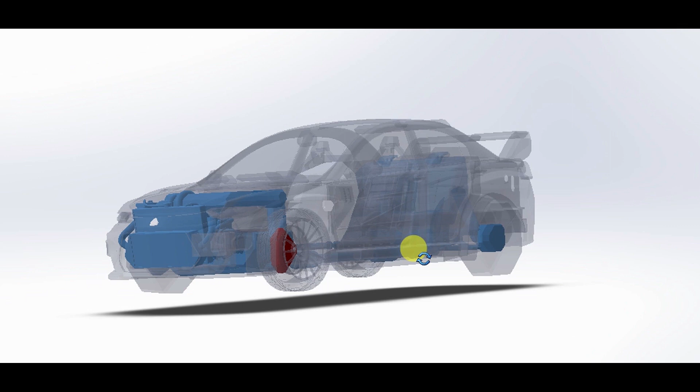On today's episode, a deeper look at the design process of the latest incarnation of a 90s icon, a hero for the Gran Turismo generation, and a legend of rallying. This is the 2018 Mitsubishi Lancer Evolution 11 by Adan Design.

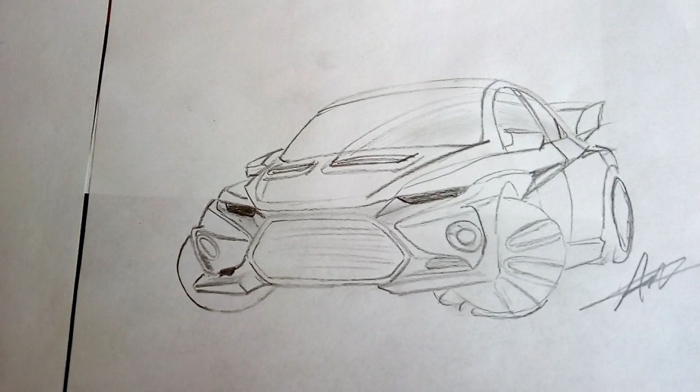These are some of the main sketches I used to develop my Mitsubishi Lancer Evolution 11 project. This one is the first to get all the main key elements I wanted the final project to have, such as the front power shield, that is this shape, this signature graphic Mitsubishi is currently using all across its model range. Of course, other Mitsubishis got massive chrome stripes right here on the side, but this being an evolution, it's all about business, and business has nothing to do with chrome. Also all about business is the front grille, that is a key evolution element across all its generations, because Evos had always got front-mounted intercoolers, and they are very exposed on the front of the car.

Even the side-mounted plate was mounted there to allow more fresh air into the front intercooler. We also got rally-inspired fog lights, and these brake intakes I took straight from an Evo 5. Also we got the main line that flows all across the car, and that, as you can see, it also evolved from these very rough sketches into something more serious. It gave me that dynamic sensation I wanted the car to have, and it started to get more and more concrete across these sketches.

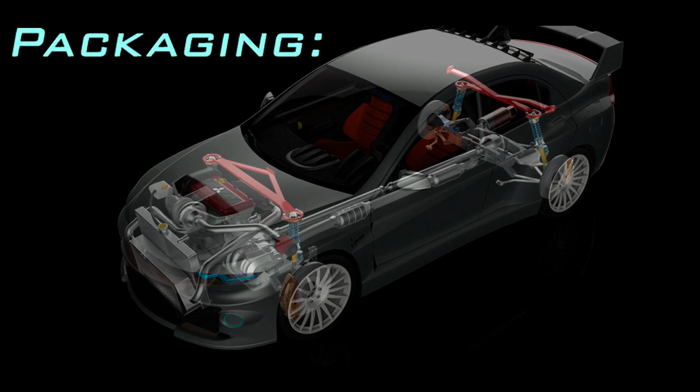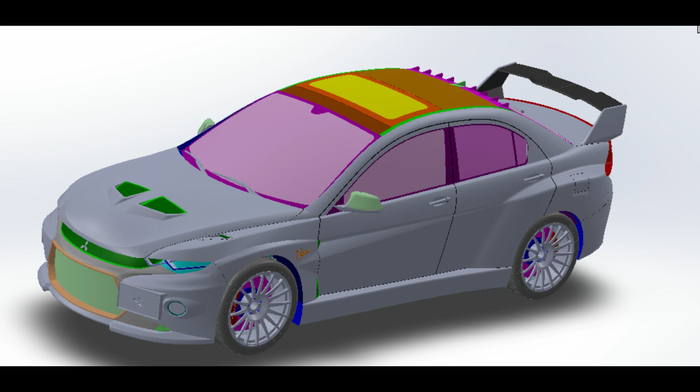First step is getting the packaging right. You know, all those things your Evo needs to be an Evo, like seating for 4, a turbocharged 2-liter engine, a complex all-wheel drive system, rally-inspired suspension, a 6-speed manual transmission. Making this will ensure the car got more realistic proportions.

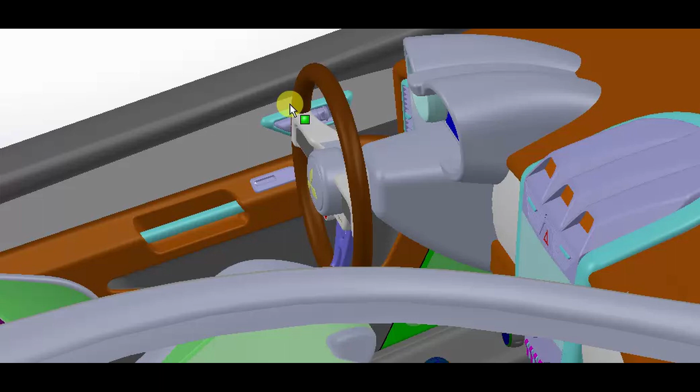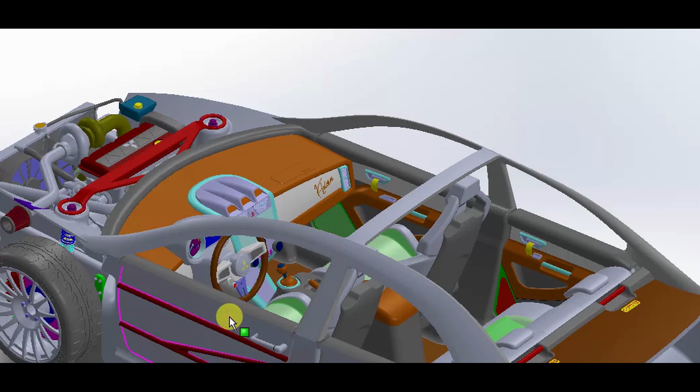I also made an interior with front Recaro seats, a rear bench, a modern Momo steering wheel, and these Porsche-style strap door handles, because I like Porsche-style strap door handles very much. The interior has two main continuous lines, this one on top and this aluminum surface that flows all around the cabin to improve the quality perception.

Also you can see that the whole center console is leather wrap. Also the steering wheel is leather wrap. Pretty much every surface you get in contact with, here shown in brown, is leather wrap.

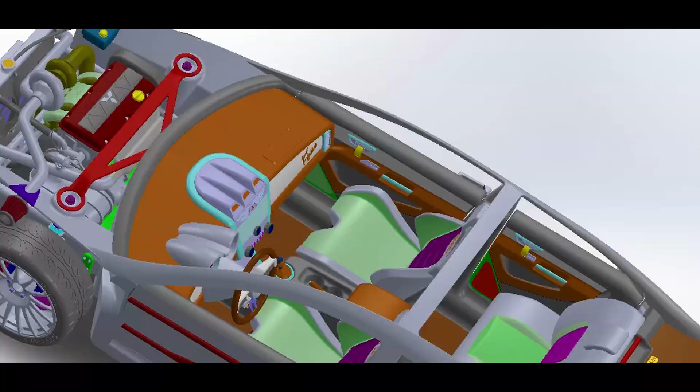I need to clarify this. Evos are about driving pleasure. They were never meant to be luxury cars, nor these good-at-everything cars like, you know, a GTI. Evos just demand a certain level of compromise. And if you take away all these little compromises, you will also take away some of the character and some of the involvement a car like this gives to you. With this said, the Evo needs to improve its interior quality and materials just to be suitable for today's market.

As a designer, you need to consider this and improve the interior without losing the Evo personality. So yes, it is a better interior, but it is still an Evo interior. This particular car took me about 3 months to develop.

I made everything from the sketching to the 3D modeling and even the rally livery, which was inspired by Marlboro rally liveries from some early rally evolutions with a touch of 90s retro nonsense graphics. Of course, this being a 2018 Rally Evo, it cares about children, and it promotes Ralliart instead of cigarettes, because this Evo wants the children to know they should only smoke their tires.

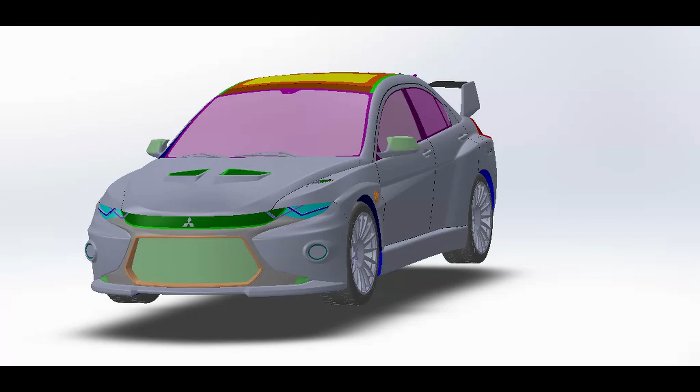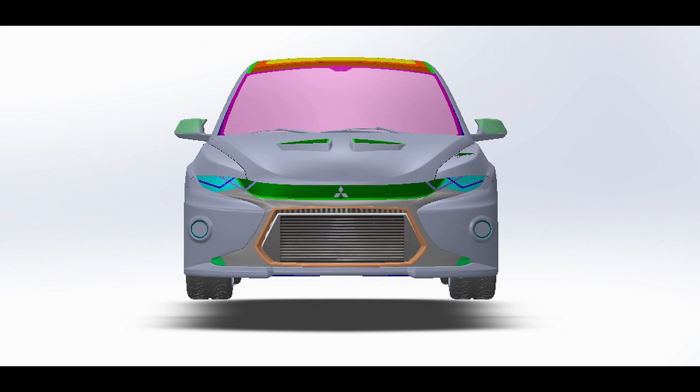So let's focus on the bodywork, since this is mainly an exterior design exercise. The main part is the dynamic shield, the graphic Mitsubishi is using as a key design element on its new design language. I think it is pretty cool and it fits the Evo like a glove, since all Evos have had this massive front intercooler.

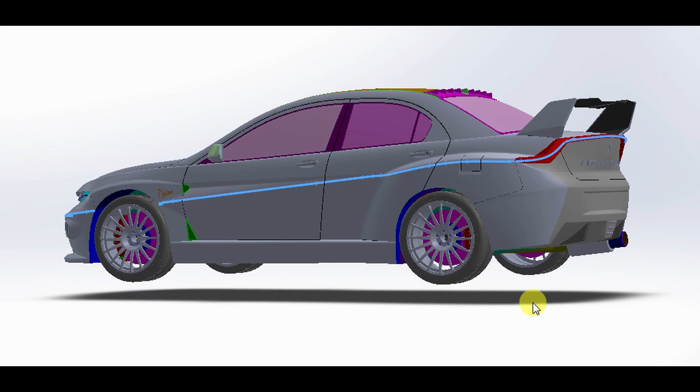That goes amazingly well within the dynamic shield graphic. As I mentioned before, I try to get the lines flowing all around the body for as long as I can. Here you can see the main line highlighted. It starts at the edge of the intercooler and goes all the way around the body into the taillights.

Incorporating them into the design. Then it gets back on the other side into the other edge of the intercooler.

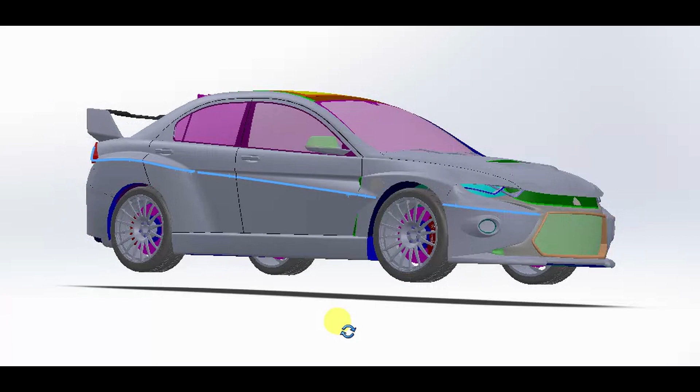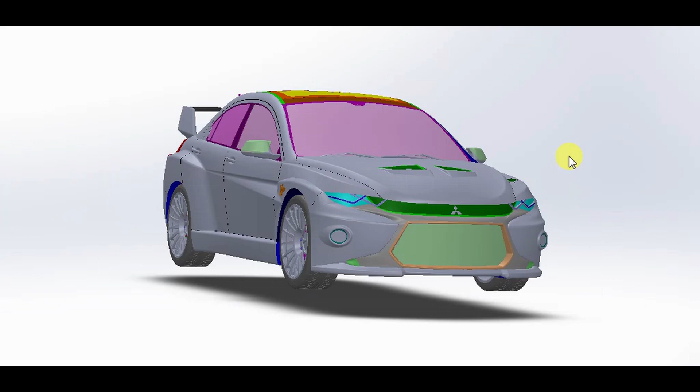Also worth noticing is that this Evo has a different approach to panels. As a designer, you should consider where different body panels meet, so you can play with the unions between them and incorporate this into your design.

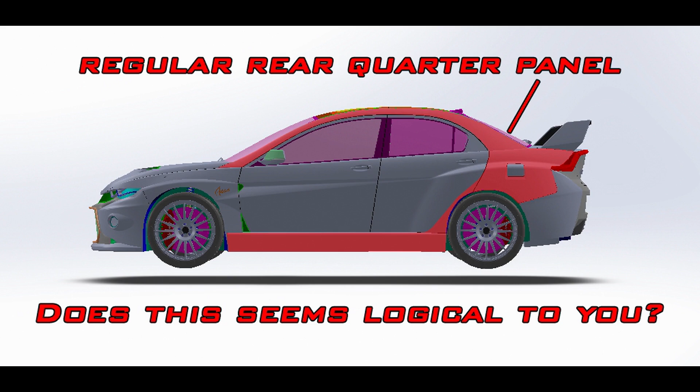In this car, I made the rear quarter panels independent and smaller. In most cars, they go from the start of the A-pillar into the taillight and down to the door sills, making them a real pain to fix or replace.

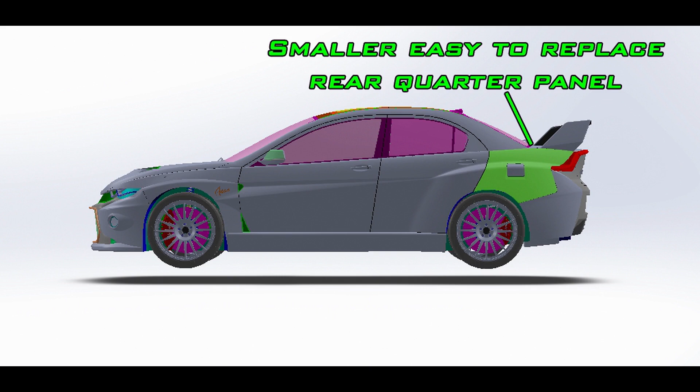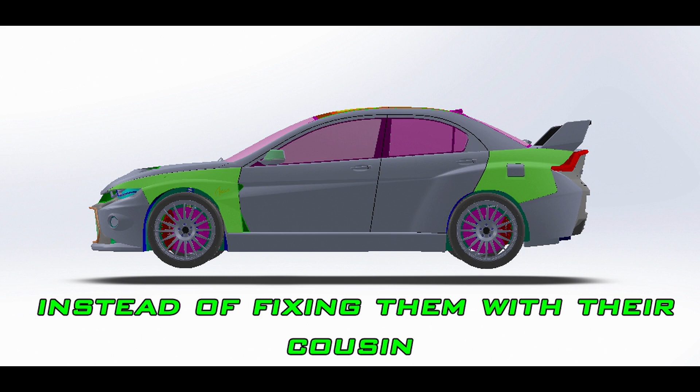But not in this car. Here you can replace them by bolting them into the unibody, like the front fenders in any other car. When they get hit, and of course they will, because this is a rally car, you just unbolt them, get a new one, paint it, and bolt it back in place.

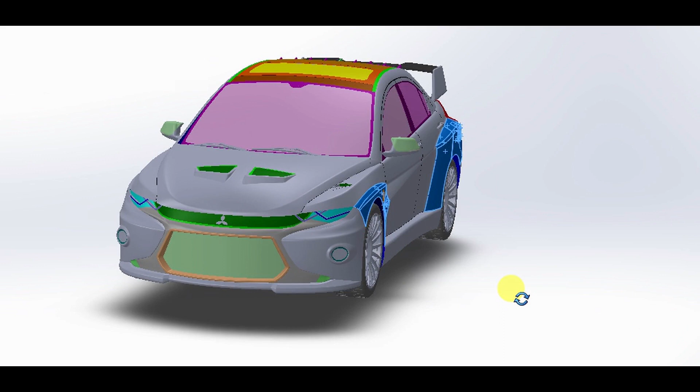Now, the Evo being a rally car for the streets means that it needs a lot of muscle around the wheel arches. Nothing shouts rally car more than massive and muscular wheel arches. This gives the car its rally stance and cool looks.

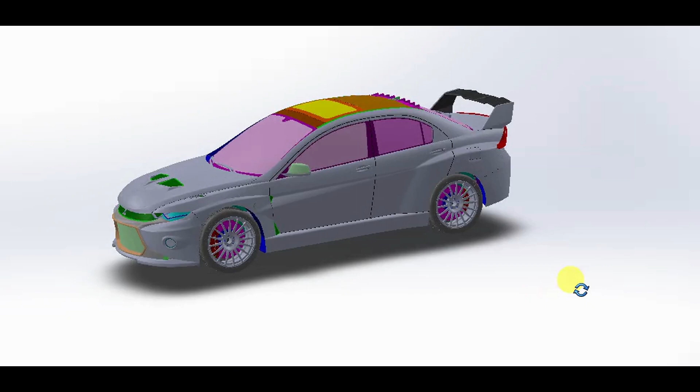The bulky fender flares are integrated into the body by the flowing lines. I also incorporated this little detail in the fuel cap to make it look as if it was embossed into the fender flare, just to contribute a little to the car's widened body effect.

Now I will unveil what I consider the best element of this design. To me, the side or profile of the car is one of the most important views, and certainly it is the largest. For it, I wanted something congruent with the main theme, aka the dynamic shield. So the idea was to create a shape that seems to flow in harmony with this theme.

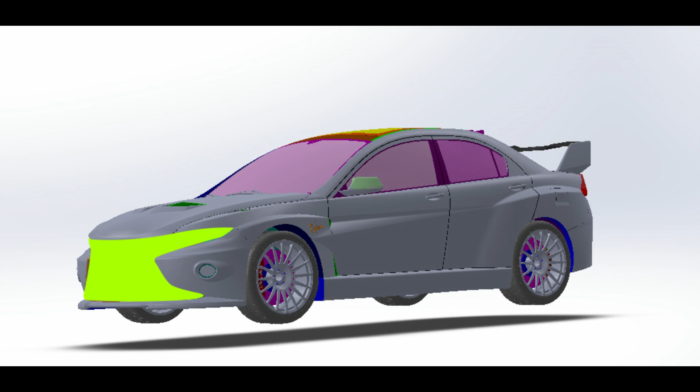This is the dynamic shield. As you remember, I used only the graphic and omitted the chrome inserts from other Mitsubishi models. But here is where design magic happens.

Let me highlight the edges from the dynamic shield. Now let's imagine them flowing and stretching as if the car was moving at speed. That's how I created the side, as a blurry image of the same graphic, but carved into the side volume of the car.

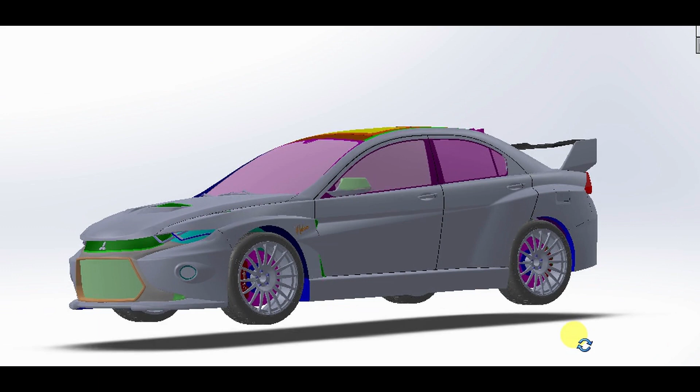I think this explains to Mitsubishi why they need their Halo car back, because a Halo car is not about sales volume, it is about inspiring and letting Mitsubishi portray their design language at its best.

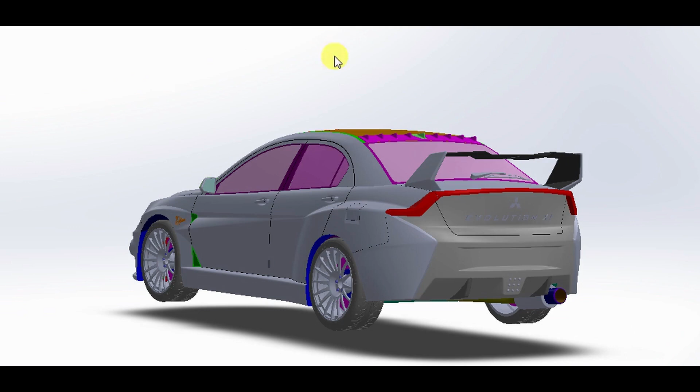Finally, on the rear of the car, as the Evo accelerates into glory, it lets us see the dynamic shield one final time, crowned by the taillights and its mythical rear wing.

As you can tell, it is not just about using the dynamic shield graphic as much as I possibly can. Instead, I try to create a sculpture of a dynamic shield moving through space and time.

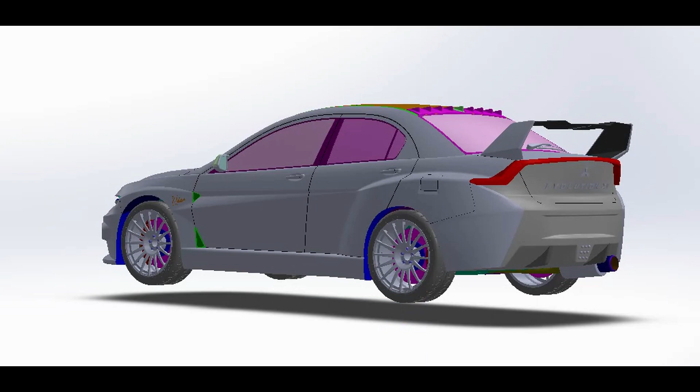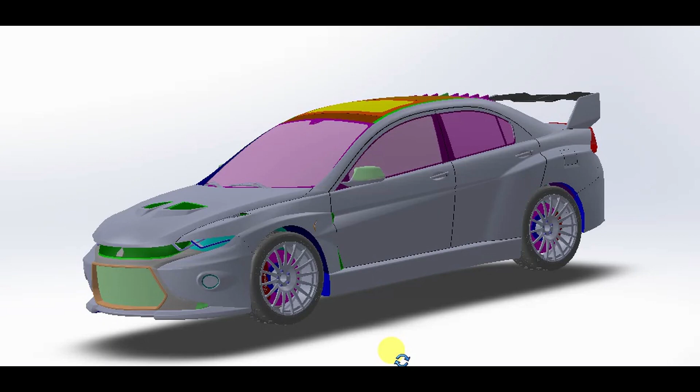You can think of this like an instant photograph of a moving car in a rally stage. It will have all these blurry flowing lines across the whole car, giving this sensation of speed. So I try to create that, but into a 3D volume.